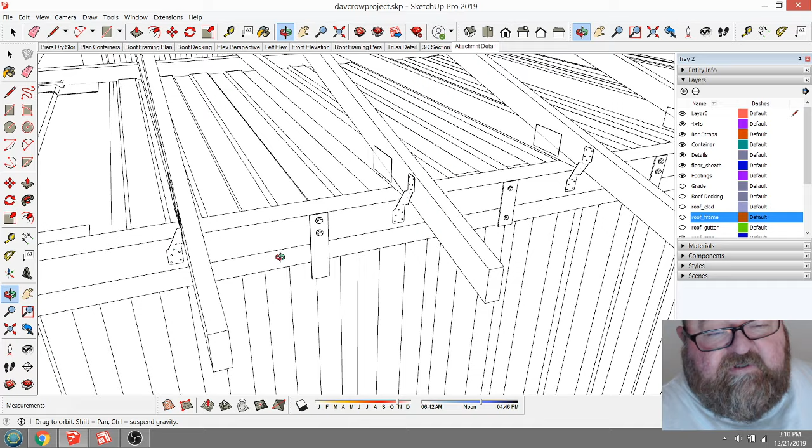And of course, that wasn't for human habitation, it was just for storage. So one thing that makes me nervous about this, not having any attachment method any closer than 4 feet, is just wind.

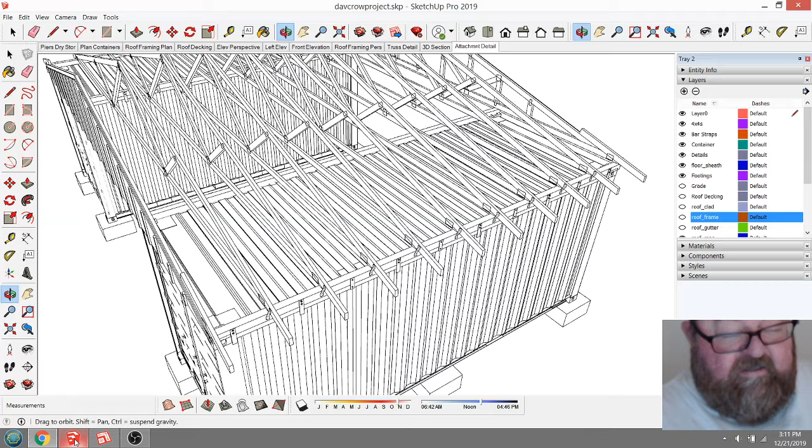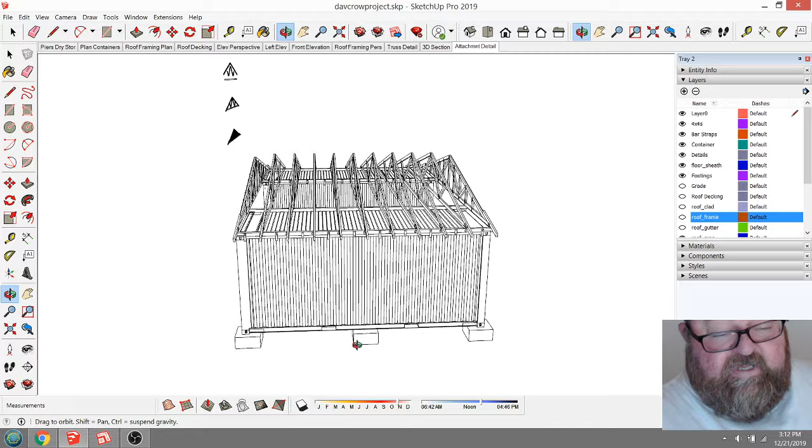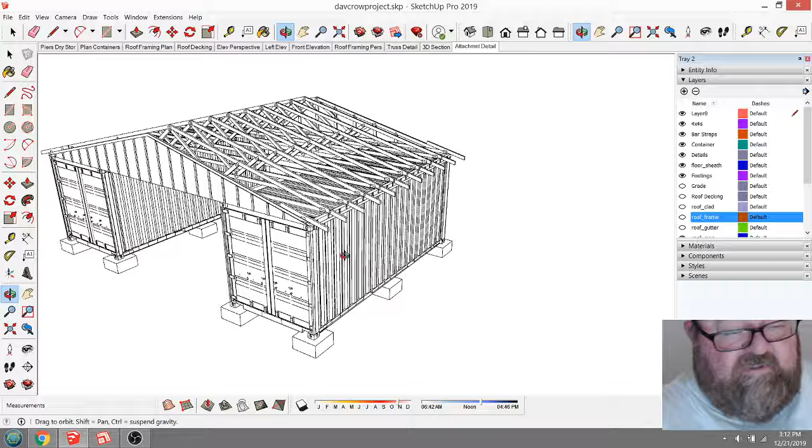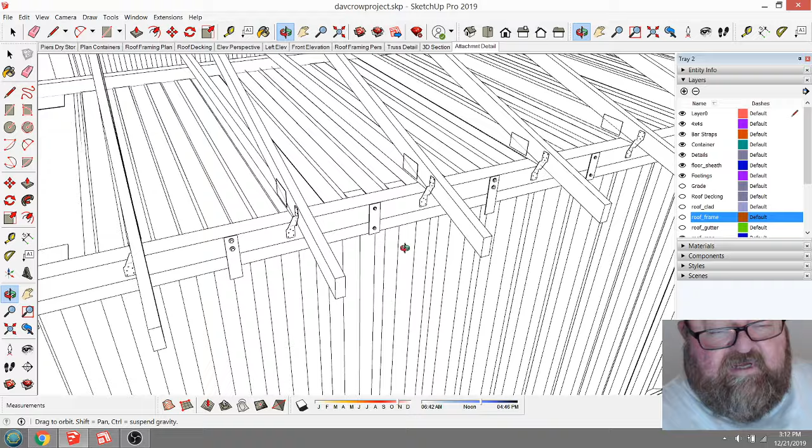And I need to show some tie downs. I think on the one I did for Dawn, we had big, thick, heavy angle brackets here, and they're bolted down to these footings. So you need something. These containers are just big hollow metal boxes. So the wind will whip them around easily, and then you attach it to an umbrella or a parachute or a wing, and now you've got the flight of the Valkyries.

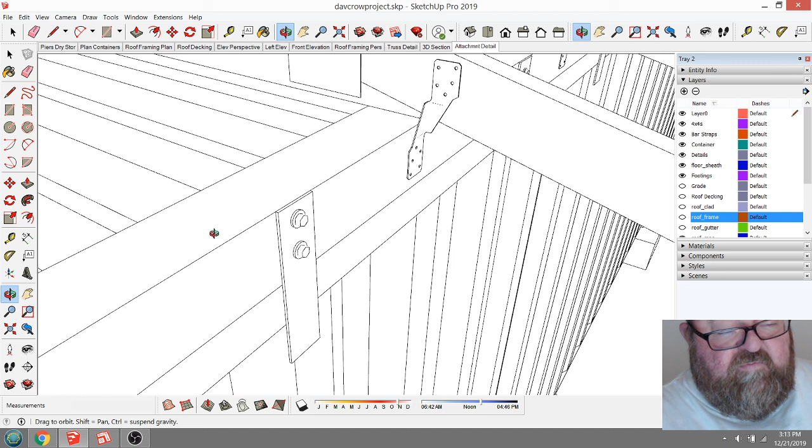So anyway, what I would do, and this is what I'm going to recommend to David, I would take this 1/8 inch thick steel bar, 2 inches wide, 8 inches tall, and I don't show the welds, but I would weld this half of it. Well, it's a little more than half, because this is a 4x4 right here.

Let me turn this on where we can get some color. There we go. There's a style I used to print drawings with, so it doesn't waste people's ink.

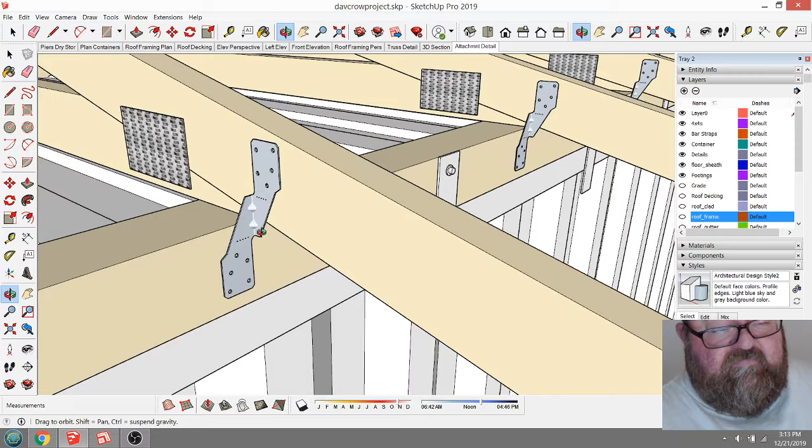But you can see here that you would put these on the raised part of the corrugated metal. You would weld it to the top channel, that top angle, and then this raised part of the corrugated metal. And so that's welded, and this is bolted to the 4x4. And then, of course, you've got your hurricane tie for the truss. The trusses are on 2-foot centers.

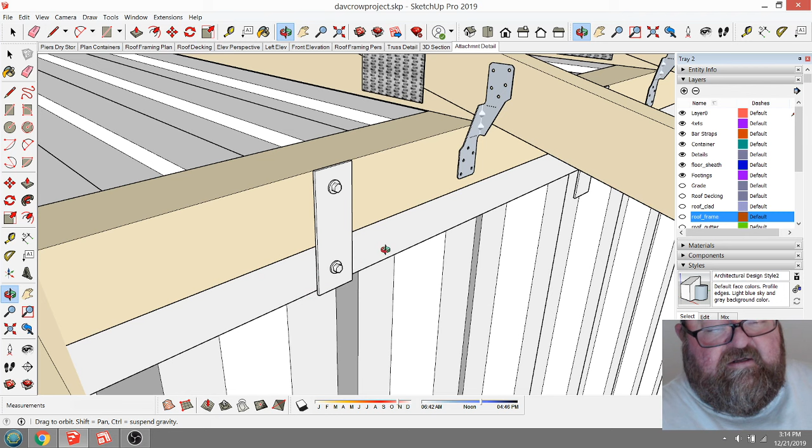And then I've got this type A, and I'll show you my notes in a minute. This is type A, and this is type B. Type B would just be like an 18 gauge piece of metal, like a strap, or maybe 16 gauge. And you would just Tech screw it. We call them Tech screws because they're self-drilling. As long as there's a hole in this strap, you can just start spinning it, and it'll drill its own hole through this angle and the siding, the metal.

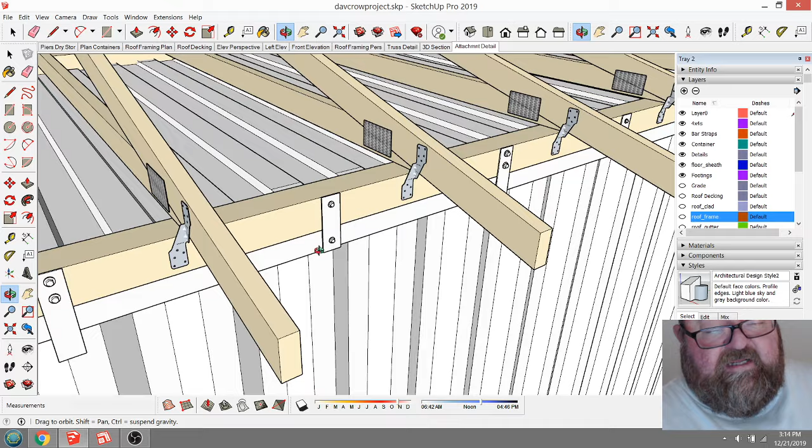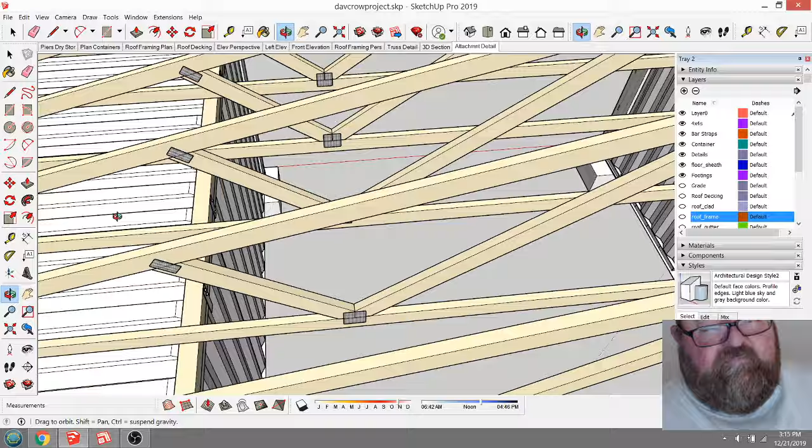And then up here you can just use a lag bolt. So that's type B. That would be a minor strap. But if I was going to use this for human habitation, I would have both of these types. Every other truss would get every other type. Now you could get by probably with just using this minor type every 2 feet, but I'd want to have some kind of welded connection at some point, and then these trusses tied off really well. So that if a big wind does come along, it's going to have to lift up this whole structure.

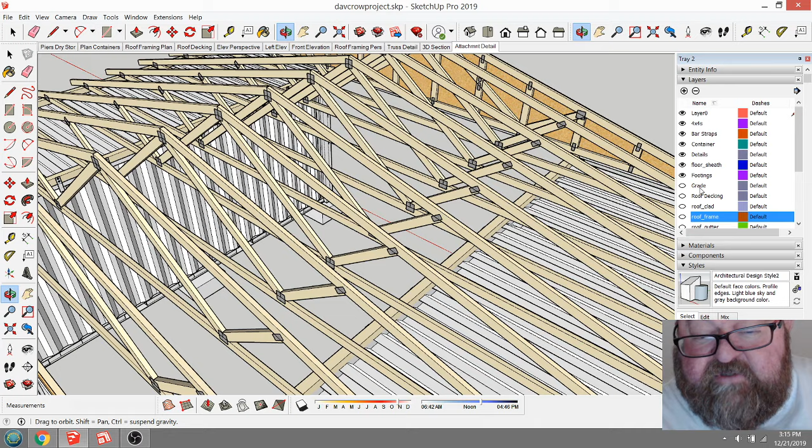Now, in between, on these intermediate 4x4s, I think you can just get by with toenailing the bottom cords. You really shouldn't have to do much there at all, but I would tend to be in a habit of toenailing that off, just to keep the bottom cords on layout. Where's my purlins? Let's see. Oh, I got the framing turned off. I was trying to show this.

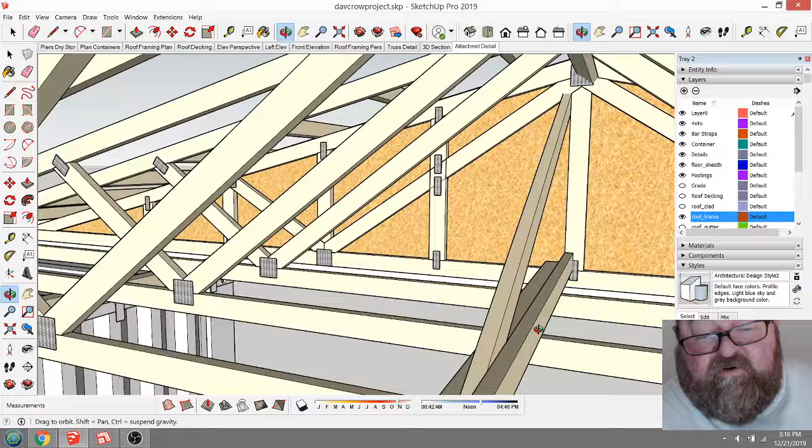There we go. And then I think I showed this in the last video, but here's my bracing. Let's see if I can get it in the right angle here. You just got a purlin, which is a 2x4 laid flat on top of the bottom cord, and then you stand one up on its edge like that. That makes your purlin, and then that makes it also easier to attach your angle brace here.

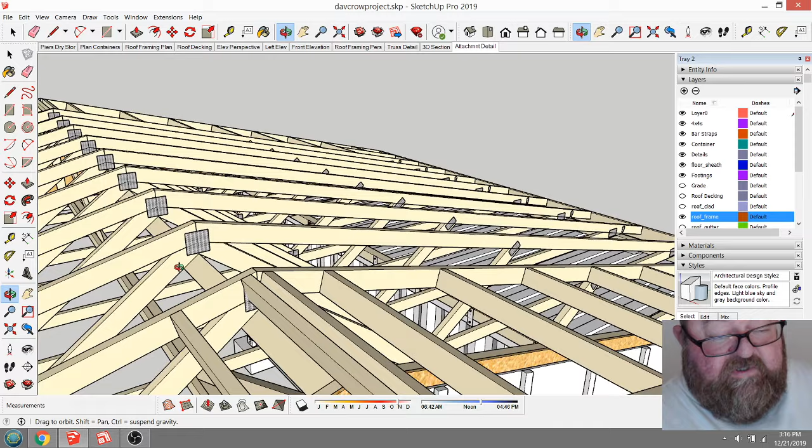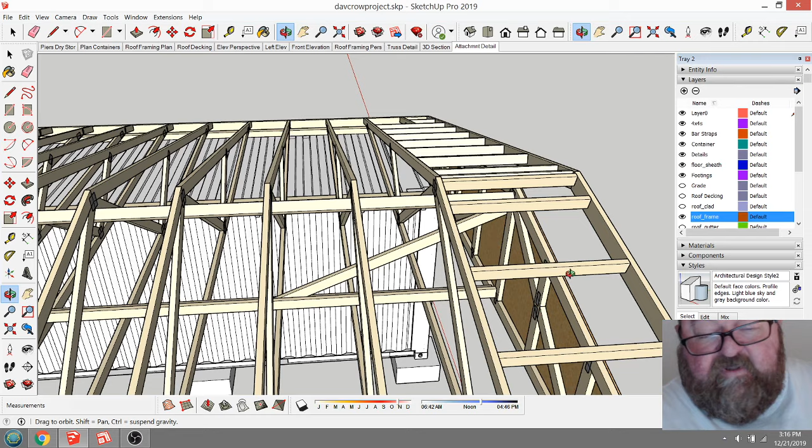You just want to get this brace as long as you can at whatever angle. That'll give it lateral bracing. And then this brace up here is one you can use. My mouse is going crazy. This one you can install while you're setting the trusses. You just put your layout marks on there every 2 foot centers, and that helps you lay those out.

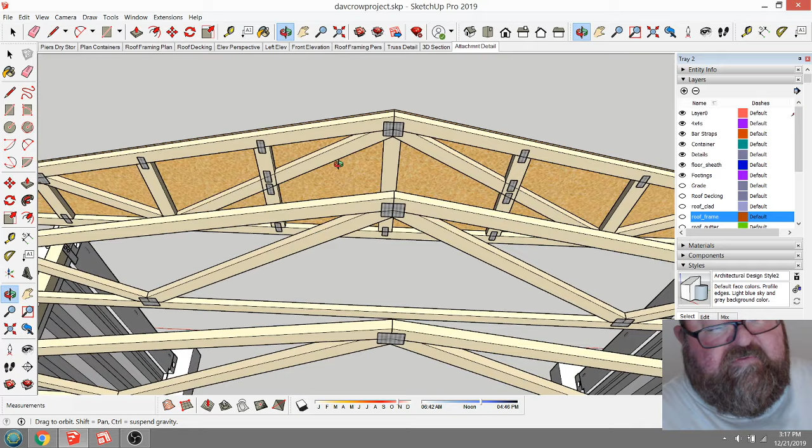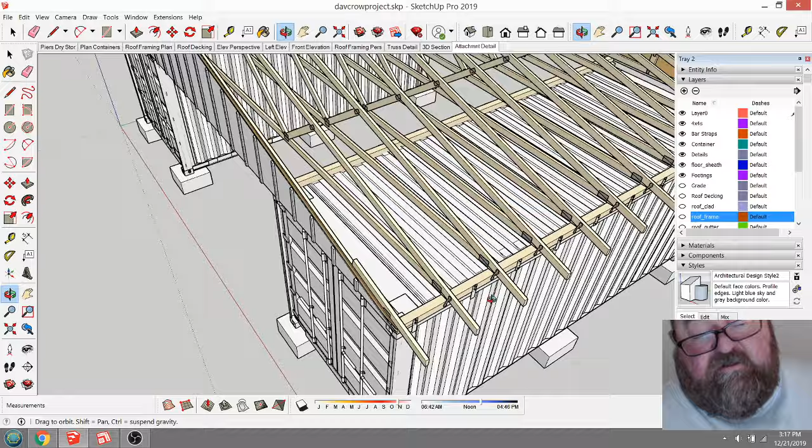And then I struggled a little bit with the... That's why I had the framing turned off. I struggled a little bit with this house line truss, because originally I had it just a typical house line truss where it just had vertical members, but it's spanning this opening right here also. So what I came up with, and we've done this on other jobs, is you just take a regular truss, and you just tell the truss company it's a gable end truss, and they'll put these vertical pieces in there so that you can nail your plywood and siding to it.

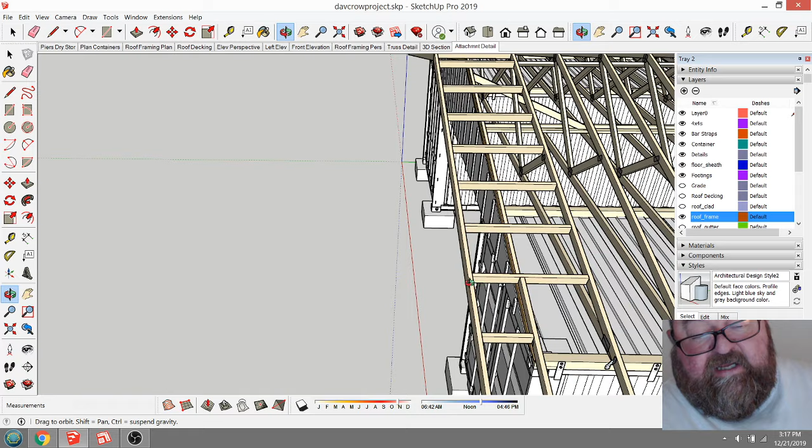And that's also a dropped truss. If the truss company does it, they'll put this tail on here for you, and then when you put your lookouts on, they can hang it. Since this truss is dropped, those lookouts can go back here and tie into this first common truss, and then they cantilever out. That's really strong. That's the strongest way to do your overhangs.

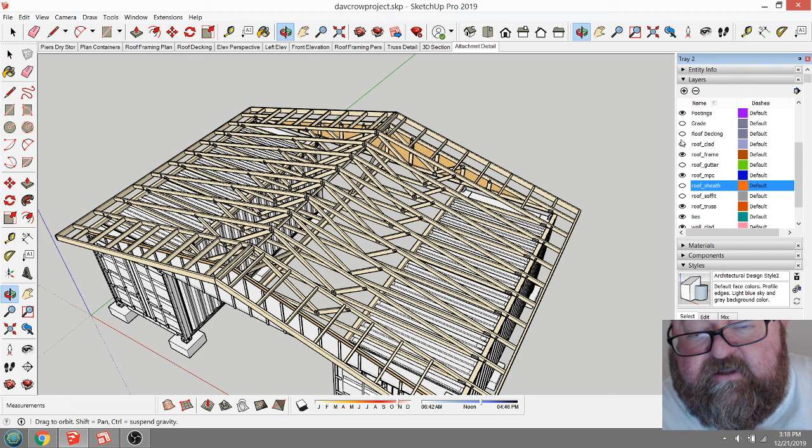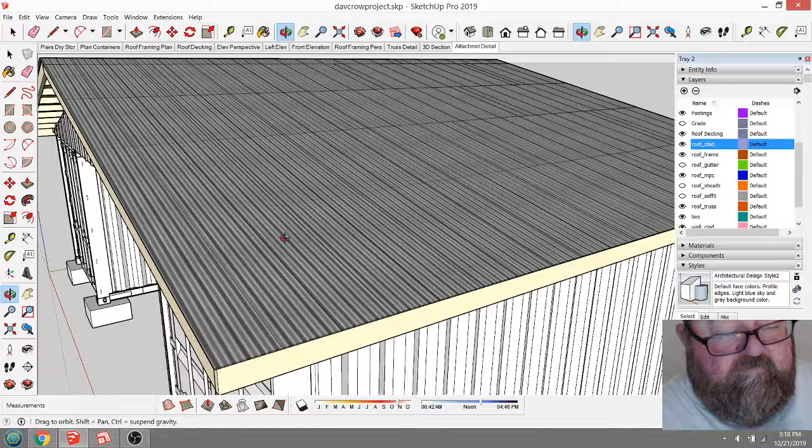So that's that. And then of course we've got our roof decking. Where's my roof sheeting? I've got another layer, roof decking, where I showed the actual sheets. There we go. I did that so David could do his material list easily. This whole thing should be really easy to come up with material lists. And then your metal roof. I'm just showing some corrugated, just because that's what I had in my textures for SketchUp.

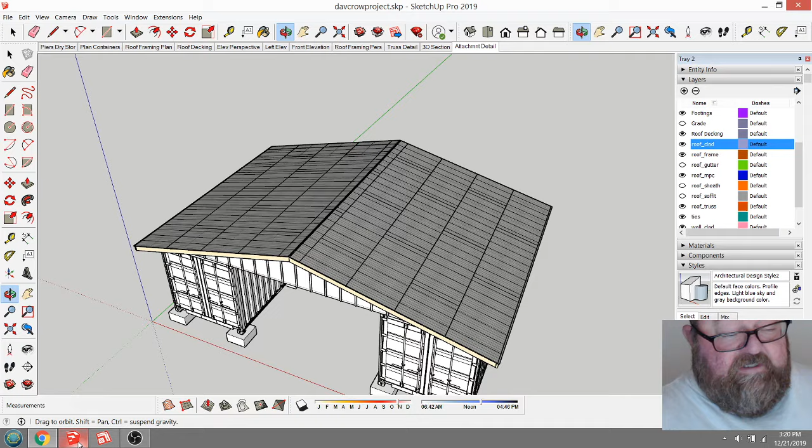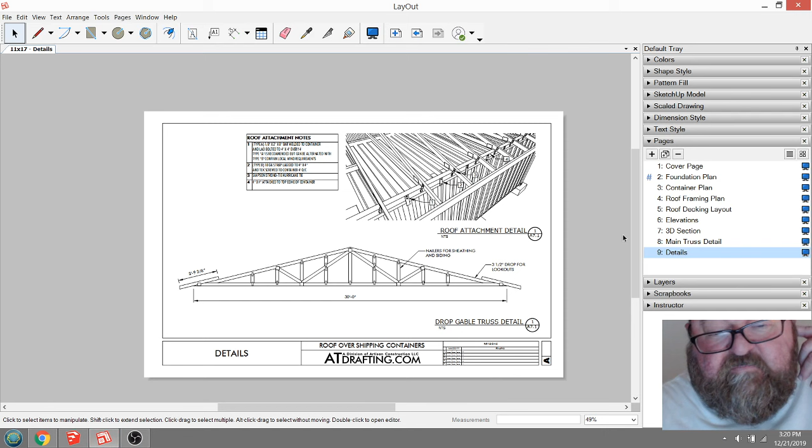And let's go back to the truss details here. I did an exploded view of the trusses, and I'll show you the paper drawings here in just a second. This is a common truss, and then this is the gable end truss, house line truss. So let's go to those drawings. I do those drawings in a program called LayOut for SketchUp. It comes with SketchUp Pro, the paid version.

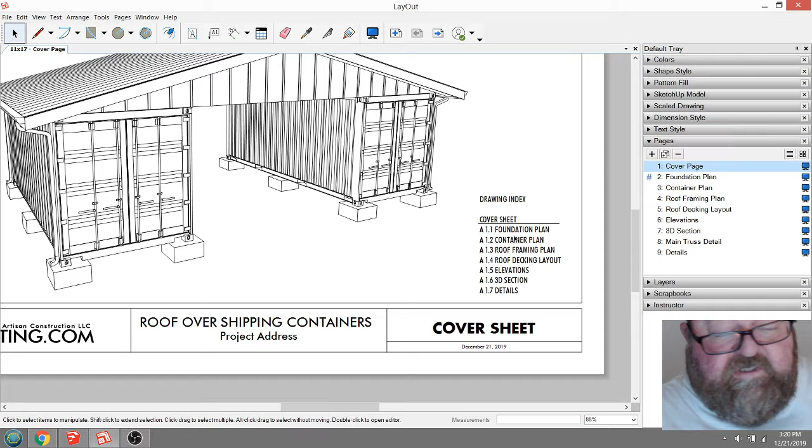And so this is my cover sheet, and we'll typically have a cover sheet in architectural drawings. One of the main purposes for that is just to give an overall graphic of the project and have project information and the sheet index, the drawing list.

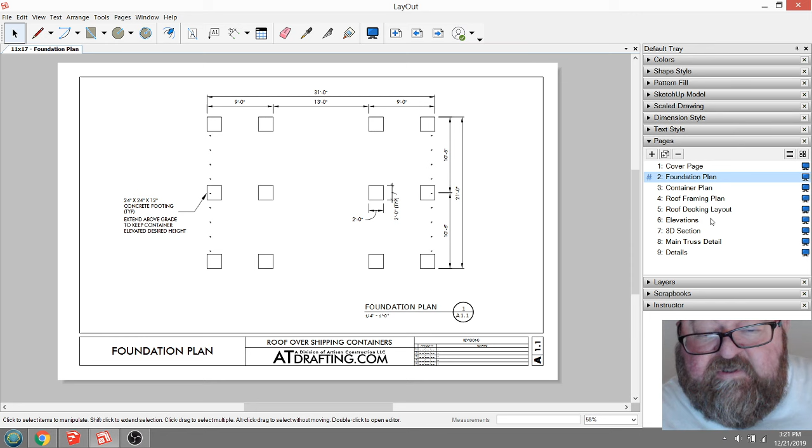And so, I just realized I added a couple of sheets here. I'm glad I went through this. And then here we got our foundation layout for the piers. Now some people will want to pour a big slab and set these on there. That's fine. Both the projects I did for the military, and now David, wanted those piers so they could just put gravel or something between the two.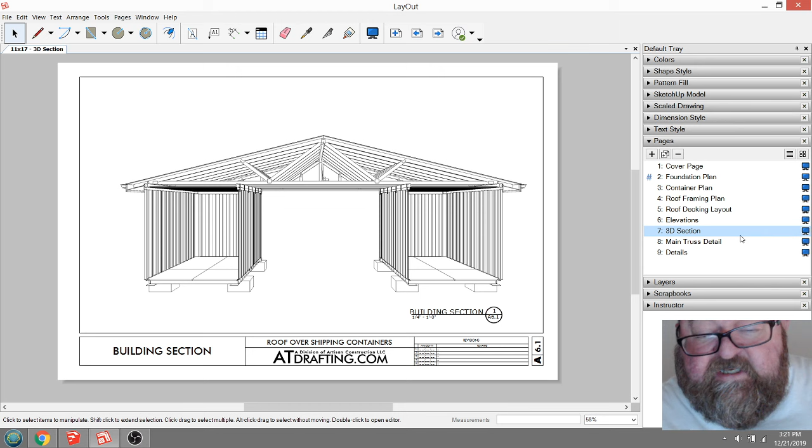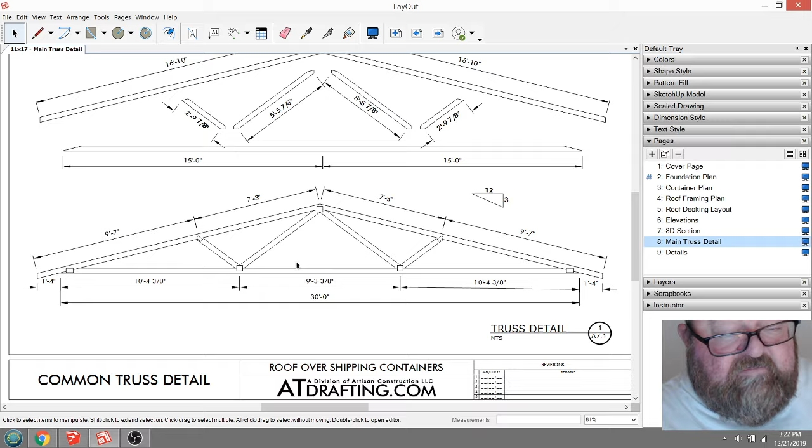And then there's your simple layout for the containers and the roof framing plan, the roof decking plan. This is your elevations. There's just a graphics section, like a 3D section, cutting through the middle. And then here's your truss details. I think he hinted that he wanted to build his own trusses. So what I did was I took all those pieces and I kind of dimensioned them. And then I showed where those points are, those connection points for the webs.

And then here's the detail for the gable end. And then here's the detail with my notes over here for the attachment method. And again, this is gonna depend a lot on whether you're using it for just storage, what type of occupancy, as we would say in construction. Is it residential? Is it storage?

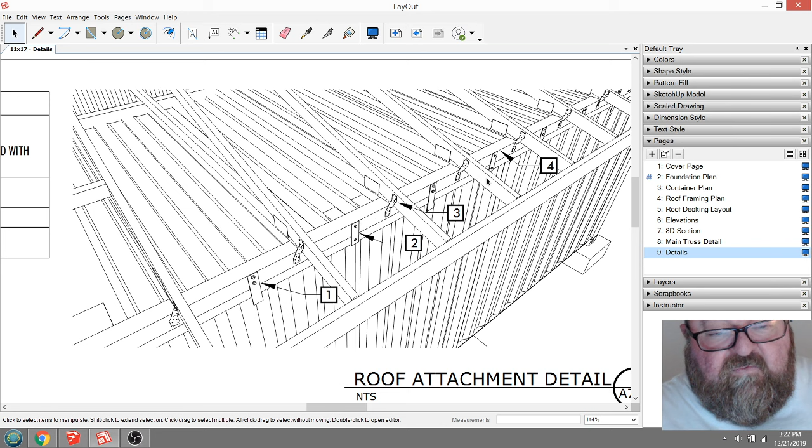Is it an outbuilding? So if somebody's going to be living in a place where I'm designing a roof over a storage container, it's going to have a very sufficient attachment method for it. And of course, the building inspector is going to be looking at this too if you're going to have to pull a building permit. So all of this stuff needs to be taken into consideration.

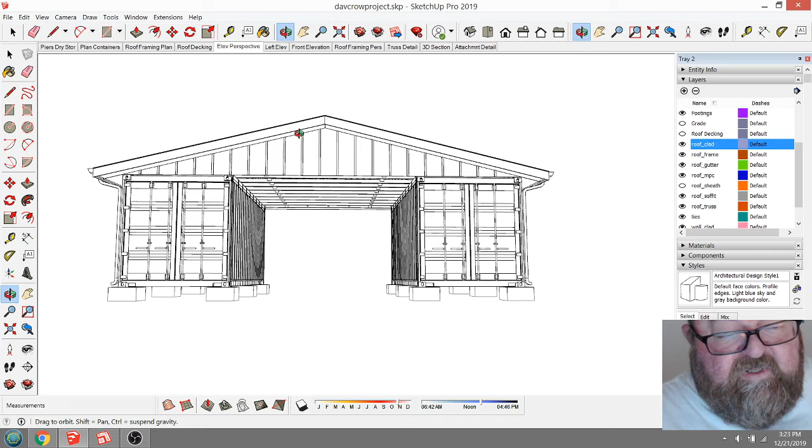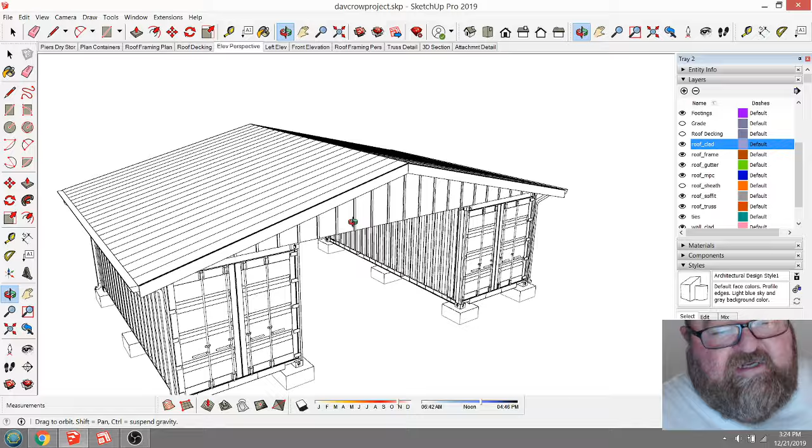I don't rubber stamp these. I wouldn't just sell you David's project. I would want to get to know you a little bit and understand your project, understand the use of it, and design it specifically for your project. So people have asked me in the past, can you just sell me these drawings? And first of all, it doesn't seem right ethically to me to sell these once I've done them for an individual. I feel like that individual kind of owns it, even though I own the design in this video. Ethically, I give them ownership of their project.

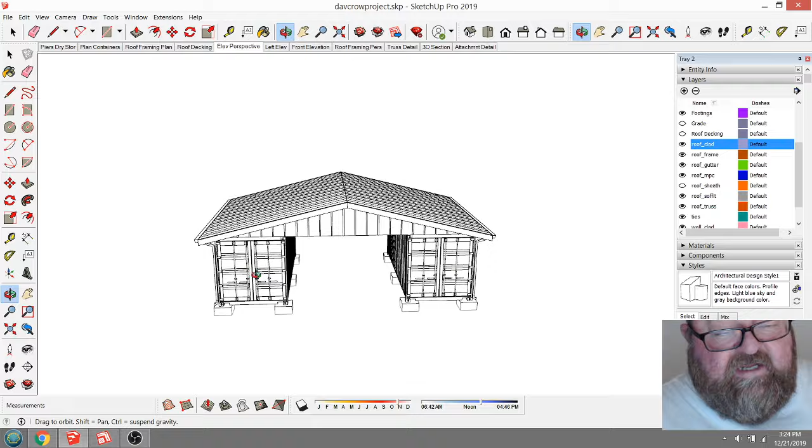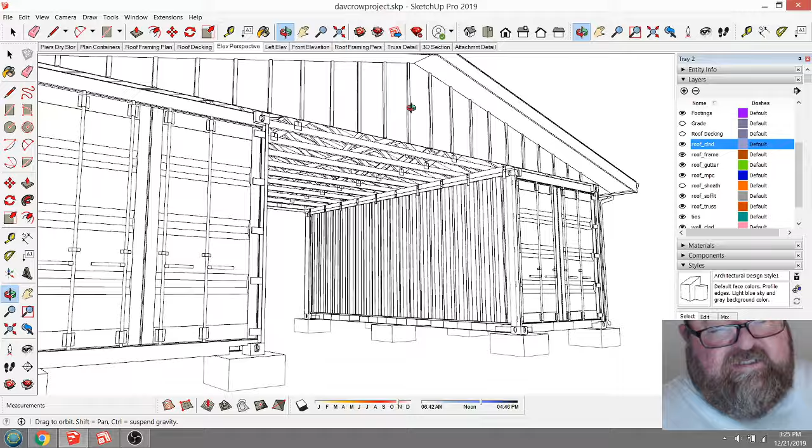So what I like to do is, like I said, make these individual projects, talk about what you're going to use it for, what size containers, what are the dimensions between here, do you want to put two containers together, what's the project use, what's the grade like, what's your soil type, all that stuff. Really, you should never just buy a drawing out of a magazine and try to put it on your property; you should always get some help from somebody who's built these things before, and design your project. Even if you're going to design it yourself, get into SketchUp, get into something, and design your project individually, and go from there.

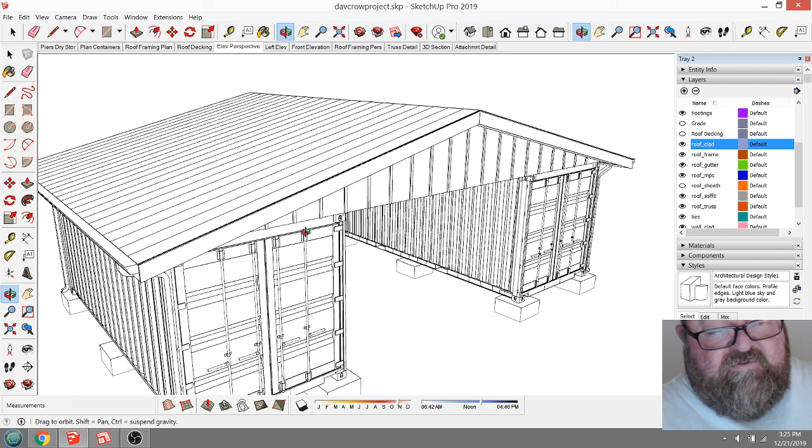By the time you get ready to build this, you're gonna be intimately aware of every single screw and nail and bracket and fastener and piece of decking and roofing. You're gonna know exactly where they all go, what they're for, and how much it's going to cost. It's just going to be that way. And David is going through this with me because he's watched these videos, I've talked with him through email, and I feel like he knows his project.

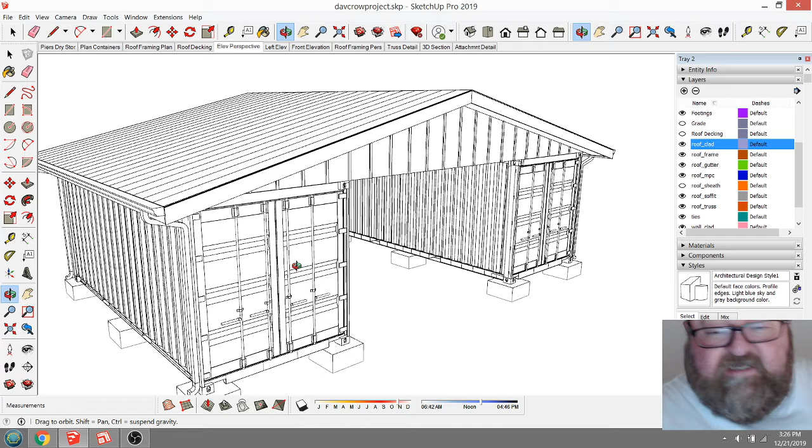So anyway, didn't mean to make this a long video. I just wanted to get that information out there about the roof attachment method.